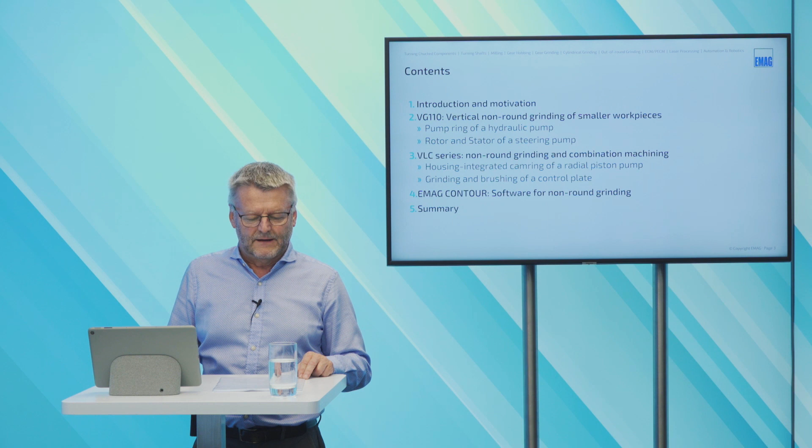Here are the contents of this webinar. First, some information about the motivation of this webinar. The second, bigger part: we will introduce our VG110, a vertical non-round grinding machine for small hydraulic parts. Next, our VLC series, bigger machines, on which we will show two applications for non-round grinding and a combination. Then you will get information about EMAG contour, a software for non-round grinding. At the end, we make a summary.

So let's start. What's the motivation of this webinar? According to a study by Growth Market Reports, the global pump market is a growth market with an annual growth potential of around 4% until 2031. Pump systems are not visible at first glance, but are very important in a variety of applications in our daily life. You find pump systems in cars, commercial vehicles, vehicles for agriculture and construction.

You can also find pumps in household applications or heating applications. The increasing demand for energy efficient pumps is likely to boost demand for pumps on the market. Therefore, the pump market is an interesting market area that differs from other market areas which currently have stagnation or decline in terms of growth. That's the reason why we focus on the pump market.

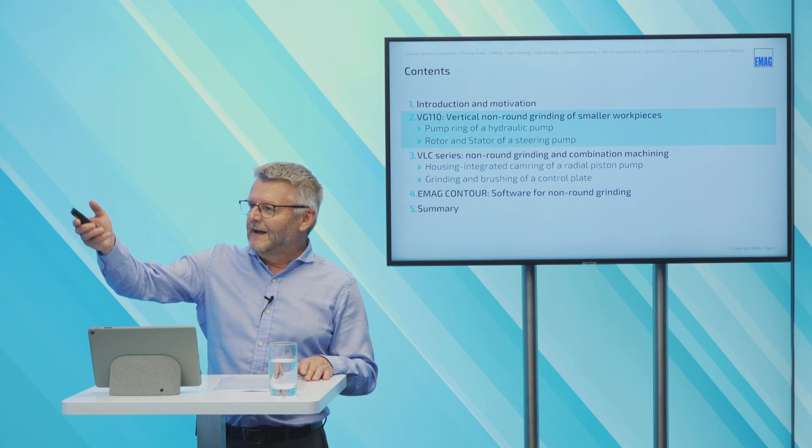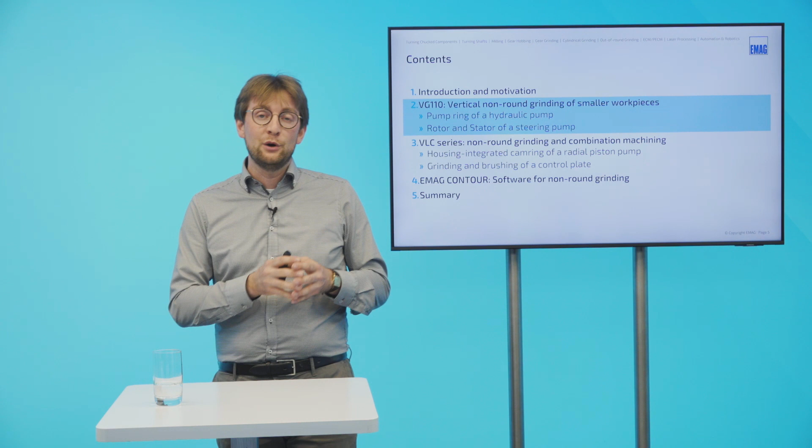Welcome, ladies and gentlemen. My name is Yannick. I'm responsible for the Department of Technology at the business unit grinding in Salach. I will now introduce our machine concept VG110, optimized for the production of small non-round geometry parts up to a workpiece diameter of 110 millimeters. I will show two use cases, two application examples we realized with our customers: a pump ring for hydraulic application, and rotor and stator of a steering pump for an agriculture vehicle.

The VG110 is a really compact solution for the grinding process, as you can see in relation to the size of the operator's panel. We have a very small footprint, just a machine width of 1.4 meters, so it requires very little space on the production shop floor. The workpiece portfolio that can be machined includes rotors and stators for internal gear pumps, and pump rings for vane pumps. We will focus on this in this chapter, but non-round parts for camshafts, for example, can also be ground on this machine.

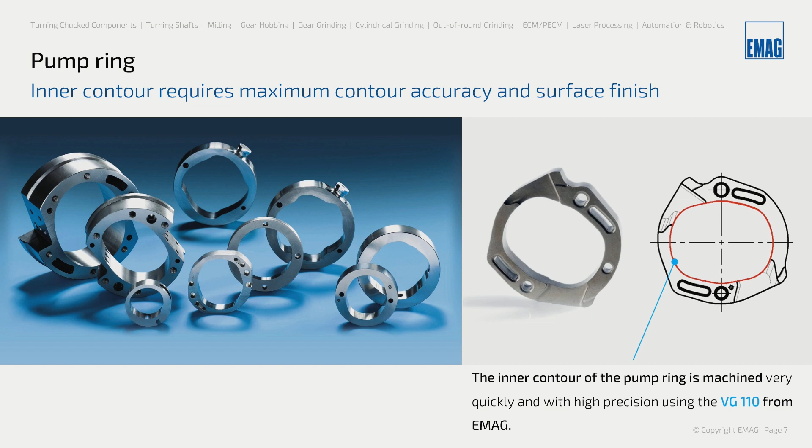We start with the core component of a vane pump, the pump ring. Its contour accuracy and surface quality significantly influence the noise emission in the application, and also the energy efficiency. So in this application, a grinding process designed for its optimum does not only save resources in the production of the part, but also in its application, because the energy consumed by pumps with good quality is much lower. So we have a positive influence on the whole life cycle of pump parts.

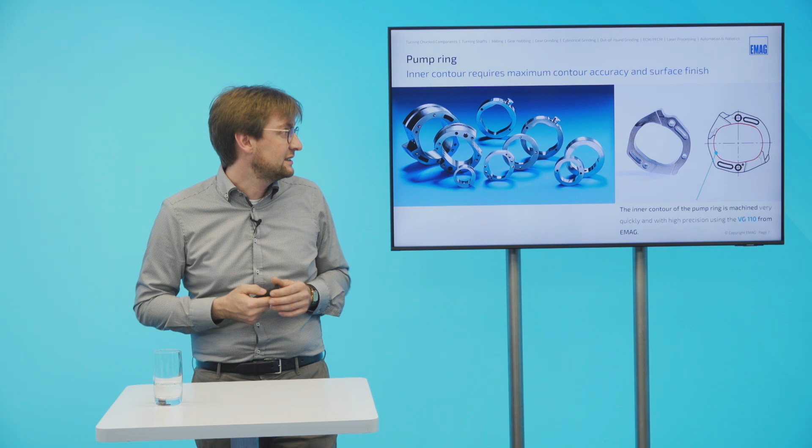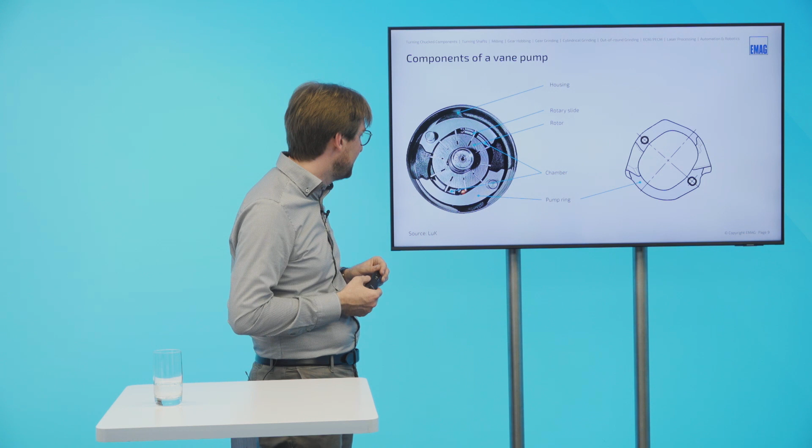This is how the part looks, made of steel. The pump ring is fixed in a housing. You see here the flat ground surfaces, and in these two areas are the inlet areas where the fluid comes in, and in the fluid chambers separated by the vanes, we have a pressure buildup.

What is the machining task for this part? The workpiece is made of hardened 100 chrome 6 or sinter metal D32. We have to grind the inner contour, and we have to remove a grinding allowance of 0.8 millimeters in diameter. The biggest challenge in this context was to achieve an average surface roughness of 0.2 microns, while machining a very high grinding allowance, nearly 1 millimeter.

Of course, there are some requirements with regard to position and profile. Position deviation must be lower than 50 microns, the profile deviation lower than 20 microns, a straightness deviation maximum 2 microns, and a perpendicularity of maximum 7 microns is required.

The basic machine concept of the VG110 is based on decades of experience at EMAG with vertical grinding machines, also with other combination technologies for fine machining.

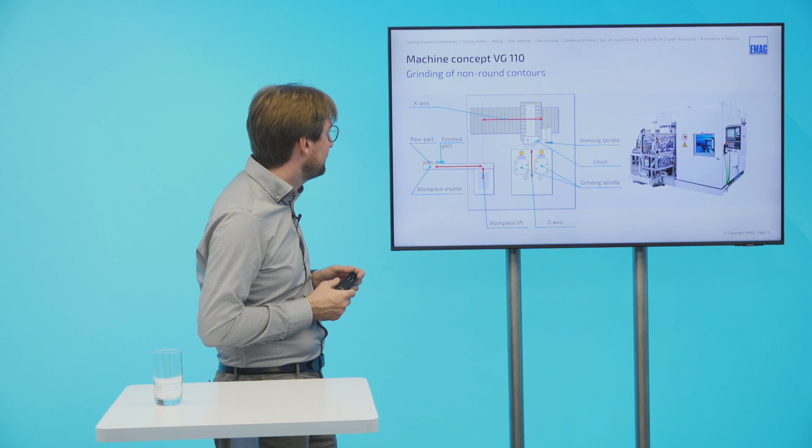The customer or his workpiece handling system positions the raw part at the workpiece shuttle in horizontal orientation, and next to this position he gets the finished part after grinding. The workpiece shuttle brings the part into the machine, so it is the interface to the surroundings.

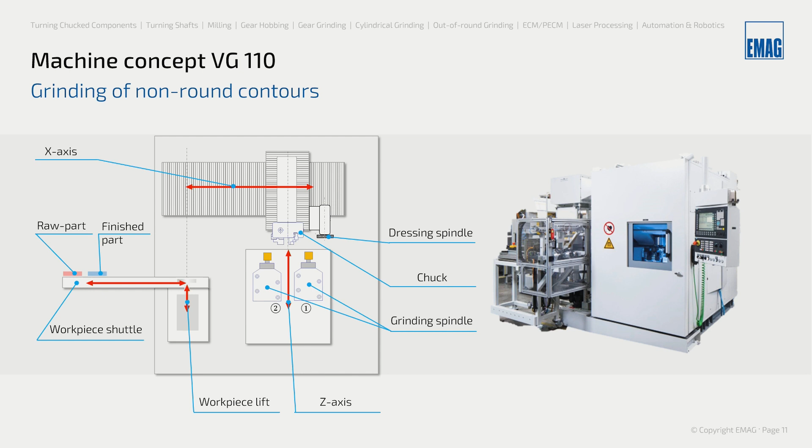The workpiece lift is responsible for the angular orientation of the part and lifts it up to the clamping device, which is fixed on the workpiece spindle. The workpiece spindle is moved in X direction and brings the part into the machining area, where we find two internal grinding spindles which are moved in Z direction towards the part.

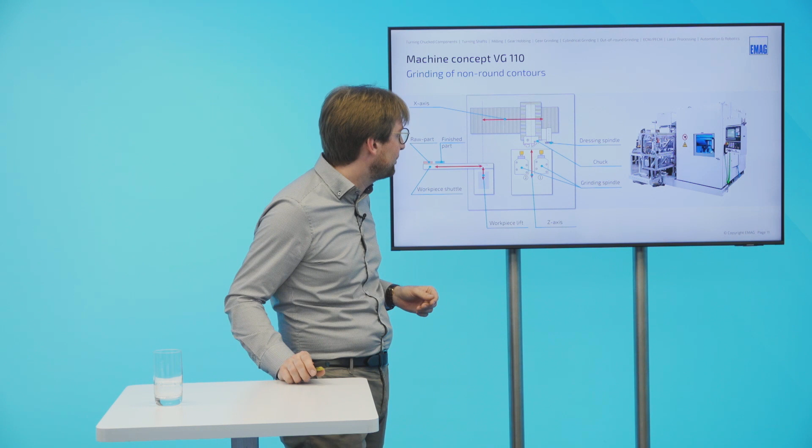In case that we use vitrified grinding wheels, they are dressed in the machine, and the dressing spindle for this purpose is mounted on the workpiece spindle.

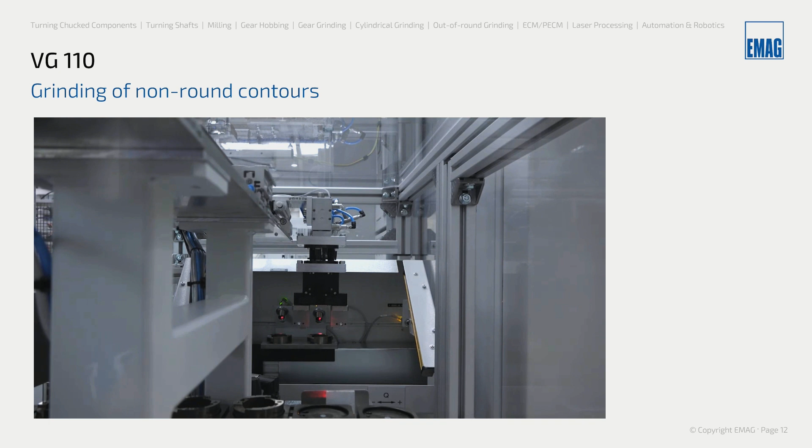Now we have a look at an automated solution for this machine concept. You see the workpiece handling brings the raw part to the shuttle and gets the finished part after grinding. Once again, the raw part is positioned on the shuttle, and the finished part is removed from its position. The workpiece lift brings it to the chuck, and now the grinding process takes place.

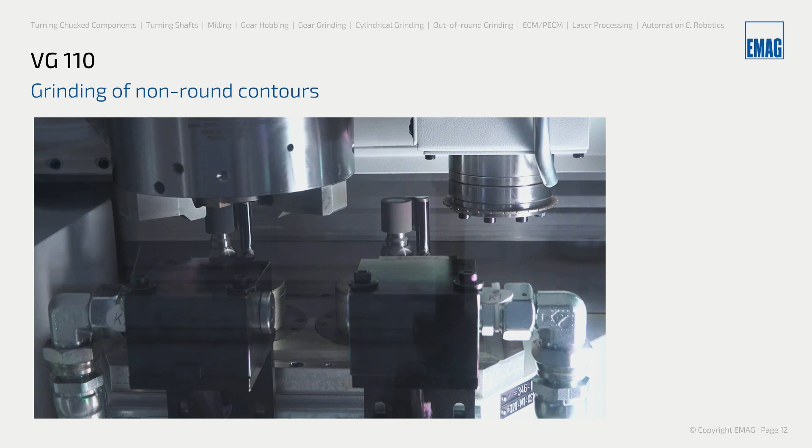As you can see, we're using 3D printed cooling nozzles to make sure that the coolant is in the correct position, especially for internal grinding applications. This is very crucial to make sure there is no grinding burn for high material removal rates.

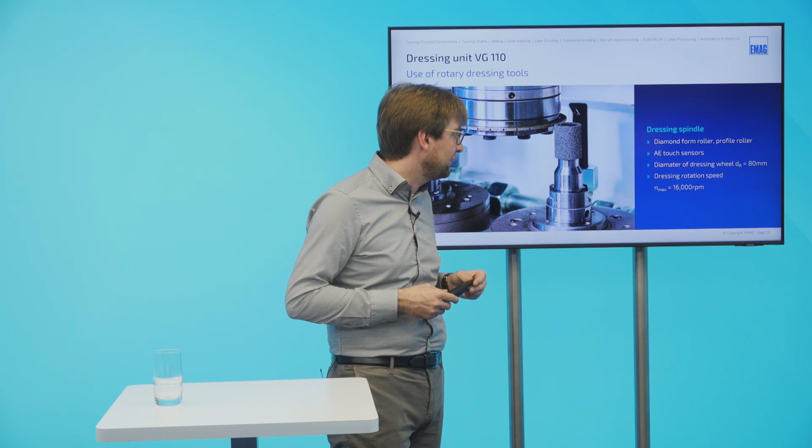The grinding wheels can be dressed in the machine. We use a rotary dressing spindle with a maximum rotational speed of 16,000 revolutions per minute. We have a touch sensor system based on acoustic emission to find the first contact between dressing wheel and grinding wheel, and to make sure to dress the grinding wheel as little as possible, but also to make sure we get the required sharpness of the wheel. We are able to achieve with this rotational speed the common ratios of dressing speed, which makes the process very robust. The diameter of the dressing wheel in this application was 80 millimeters.

Our grinding strategy is based on a two-step grinding process. First, we did a pre-grinding process to remove as much material as possible with a very high feed rate. For this purpose, we used an electroplated CBN grinding wheel. The non-round geometry was realized by an interpolation of the X-axis and the rotating C-axis.

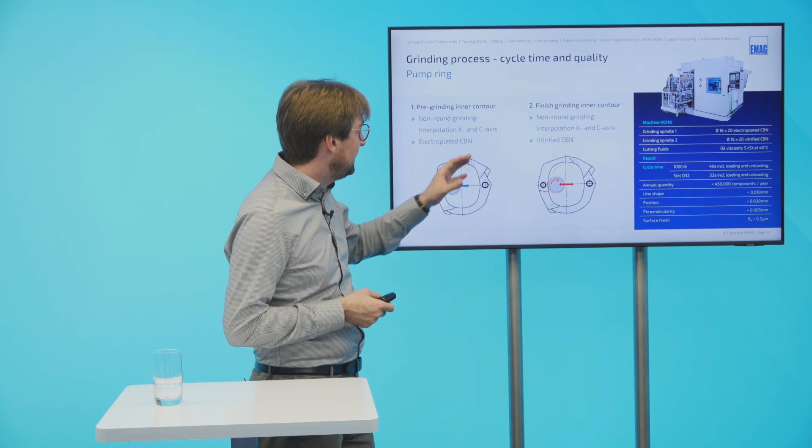After getting very close to the final geometry, we used a finish grinding process for the inner contour to make sure that the shape deviation is as small as required, and also to make sure that the surface roughness of 0.2 microns was achieved. Here we use the vitrified CBN grinding wheel, which has been dressed in the machine. The grinding wheel diameter was 16 millimeters in this application, and the width of the grinding tool 20 millimeters.

We used oil as coolant. It is very important to mention that the viscosity should not be higher than 5 centistokes, because it's very dangerous to get an aquaplaning effect. We have a very large contact area between the small grinding tool and the workpiece, and an oil with higher viscosity can lead to high normal forces, which causes shape deviations of our part.

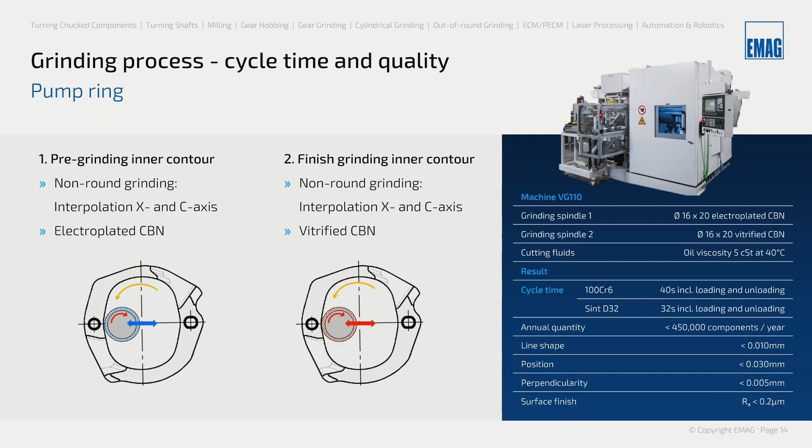We achieved the following cycle times for 100 chrome 6: 40 seconds, which includes loading and unloading of the part, and of course the two grinding steps. Because of the better machining behavior for the sinter metal part, we achieved a cycle time of 32 seconds. All in all, an annual quantity of 450,000 parts could be machined with this concept.

The achieved quality is also shown here. Straightness deviation was lower than 10 microns, position deviation lower than 30 microns, perpendicularity smaller than 5 microns, and the biggest challenge in this context, average surface roughness, was achieved with lower than 0.2 microns.

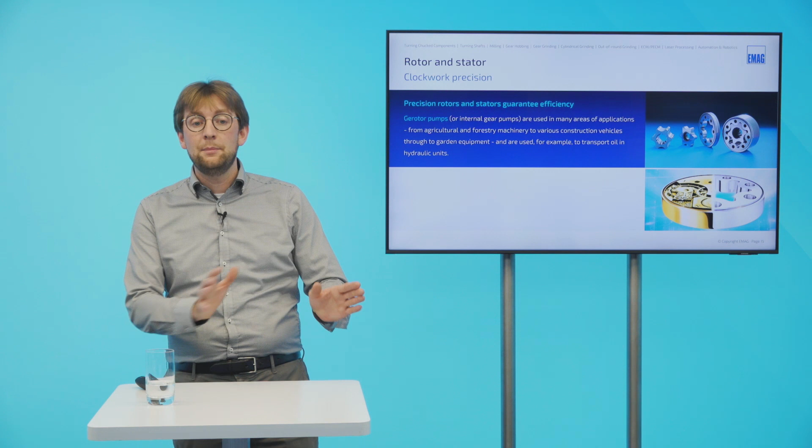Another application example where surface and geometry quality is very important are Gerotor pumps, also known as internal gear pumps. You find them in many hydraulic applications: agriculture, forestry machines, construction machines, equipment for garden, or even in consumer goods.

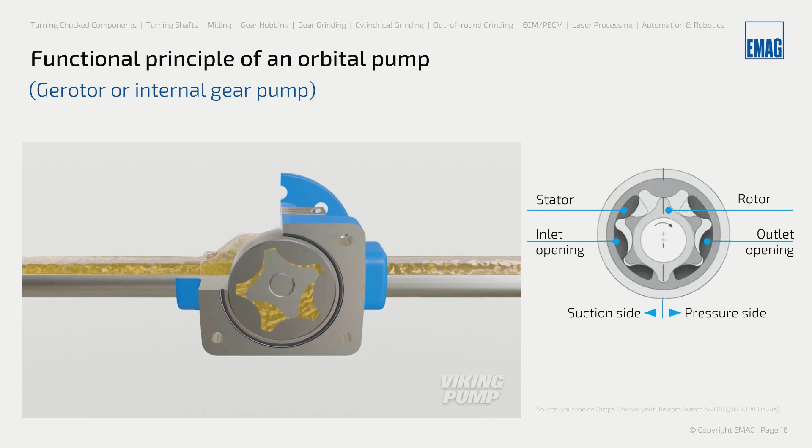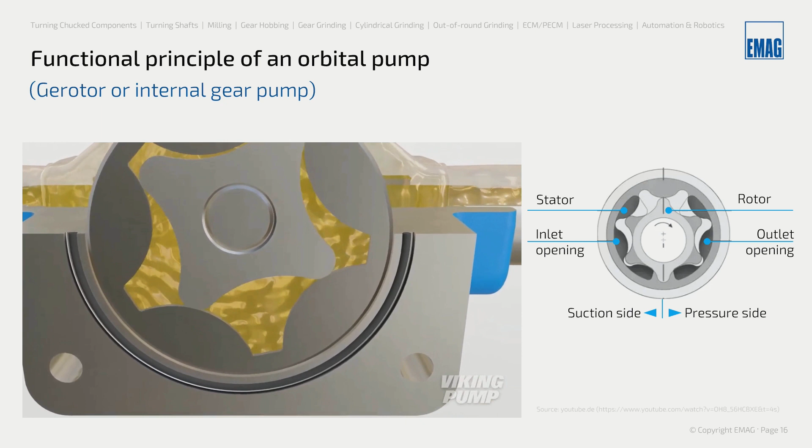The functional principle of this part is a bit different. We achieve an increase of the fluid volume at the inlet side by the geometry of rotor and stator and the required relative speeds. We have an increase of volume on the inlet side, and then the chamber volume gets smaller, so we have a pressure build-up. This is why, especially in this case, the geometry of the part and its shape deviations are very important for the application behavior.

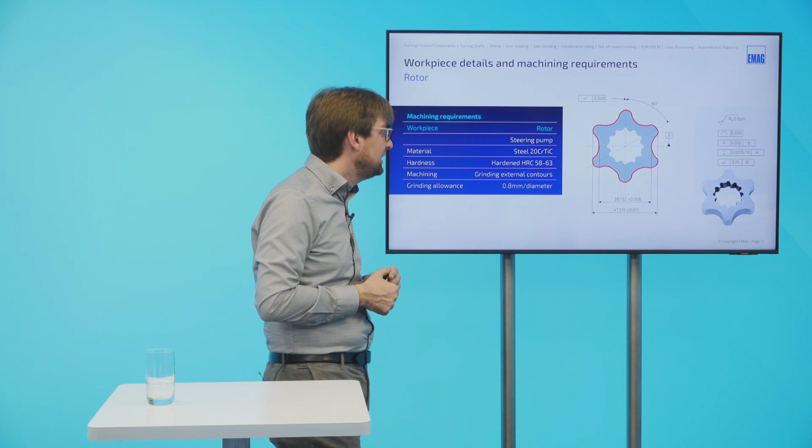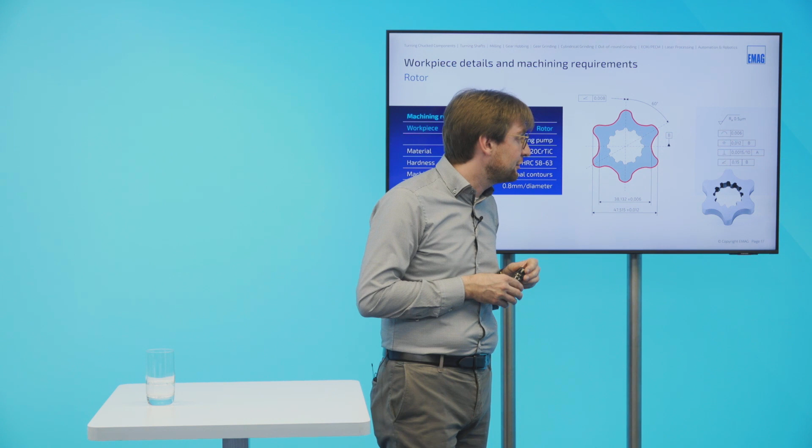For the rotor, we had to grind the external contours. Material was steel 20CrTiC, hardened up to a Rockwell hardness of 63. The stock allowance for this application was 0.8 millimeters. The accuracy of the finish diameter was plus minus 6 microns, and we had to achieve an average surface roughness of 0.5 microns, profile deviation lower than 6 microns, parallelity of the part referring to the B-axis lower than 12 microns, perpendicularity maximum 15 microns, and also the angular deviation, quite challenging, for the angle between the peaks of the polygon.

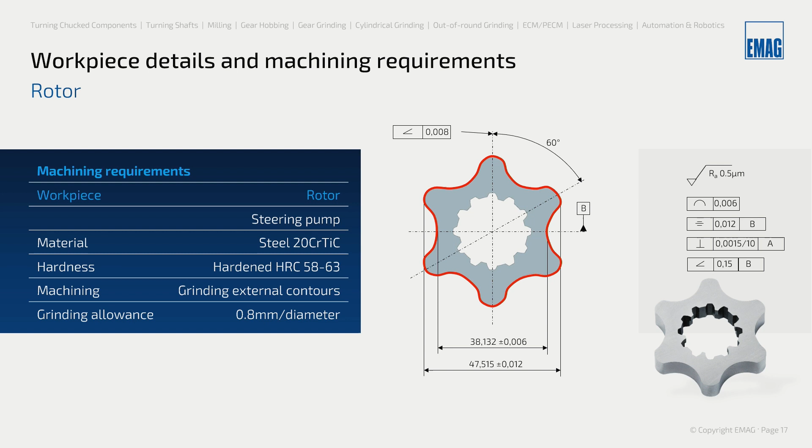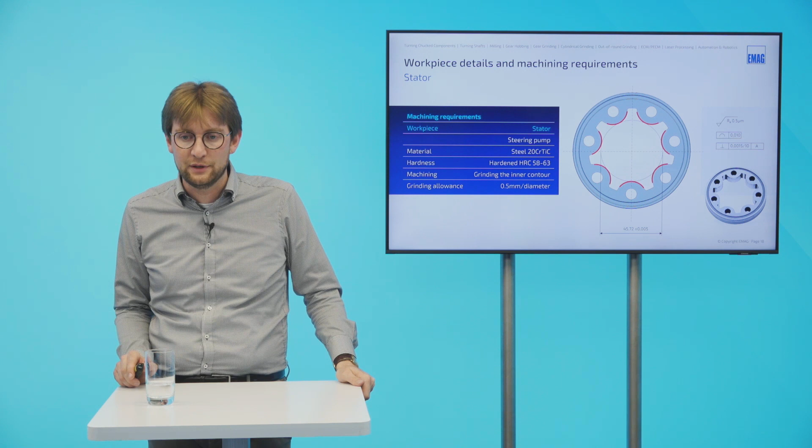What was the strategy for this grinding application? We first did a pre-grinding process. The aim was to achieve a very high material removal rate, then do an intermediate measurement procedure with an integrated probe in the machine, do the correction of the diameter, and then carry out a finish grinding process to make sure that the surface and geometry quality is according to the requirements.

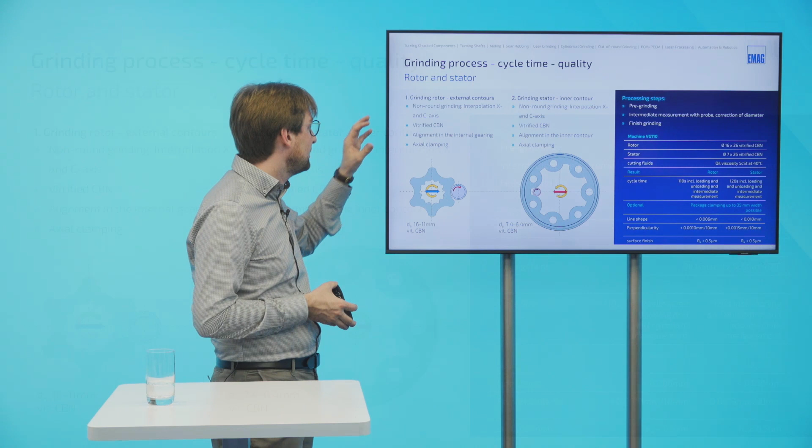For the external grinding process of the rotor, interpolation of X and C axis also took place. We used a vitrified CBN grinding wheel. We did the orientation and angular deviation according to the gearing inside, and then did axial clamping on the workpiece spindle. The geometry allowed us to use a grinding wheel diameter of maximum 16 millimeters.

For the inner contour grinding process, the geometry only allows a vitrified CBN grinding wheel with a maximum diameter of 7.4 millimeters. The grinding wheel width in both cases was 26 millimeters, chosen according to the width of the workpiece.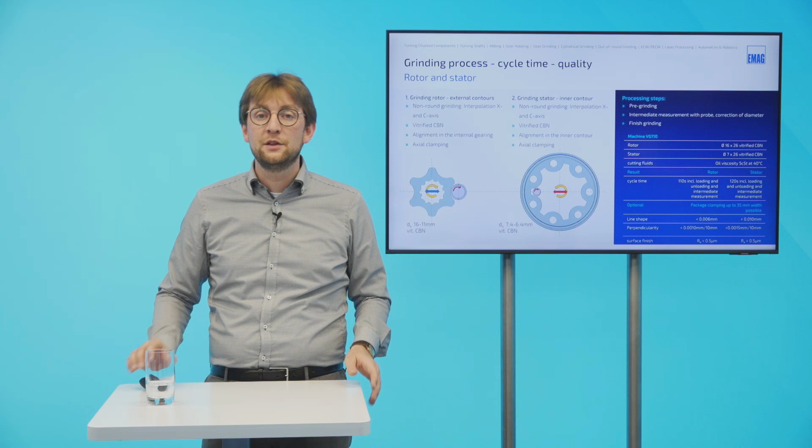The same coolant was used, oil with a maximum of 5 centistokes, and this resulted in a cycle time of 110 seconds for the rotor, which includes loading, unloading, the measurement, and the two grinding process steps. For the stator, it was 120 seconds.

Depending on the workpiece geometry, especially the width of the workpiece, it would even be possible to grind more than one part in one operation. We would use a package and clamp this in the chuck, possible up to a width of 35 millimeters for this geometry. In case we are able to use bigger grinding wheel diameters, then even thicker packages would be possible to machine.

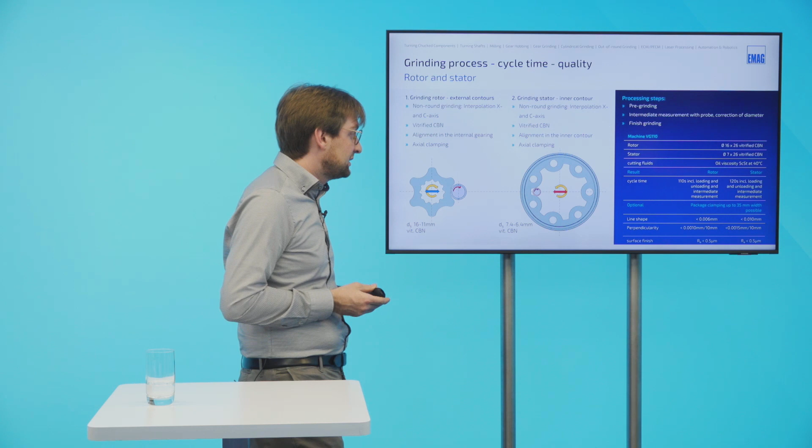The straight deviation that we achieved was 6 to 10 microns, perpendicularity also according to the requirements, and the surface roughness lower than 0.5 microns.

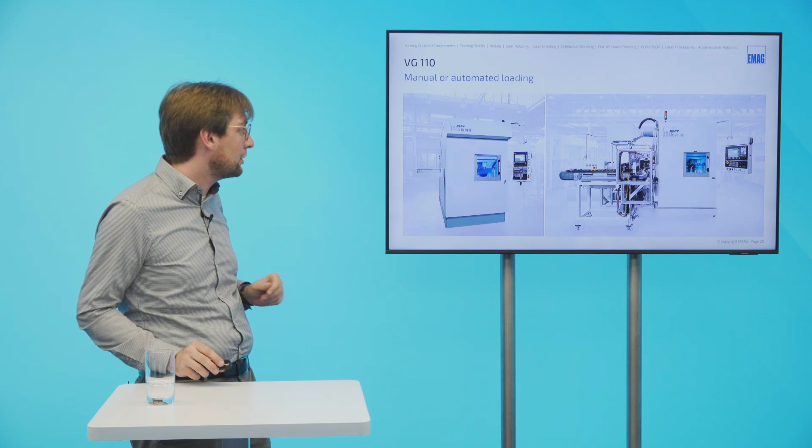As already mentioned, the workpiece shuttle is the interface between machine and surroundings, and can be operated by manual loading, or you can also discuss with EMAG our in-house workpiece handling system to do an automated loading of the machine.

Before I finish this chapter about VG110, I'd like to summarize the main features of this machine. We have very high vibration damping because we use our mineralite machine base. This enables us to achieve a long tool life and high surface qualities. Because of our vertical spindle orientation, the chips can fall down into the dust collector, reducing the interface between abrasive particles and the machine axis to a minimum.

We have short chip-to-chip times because of our integrated automation by means of the workpiece shuttle and the pickup spindle. We have a very small footprint, so you need very low space in your production, and the accessibility of the grinding spindles and also the clamping device is very good.

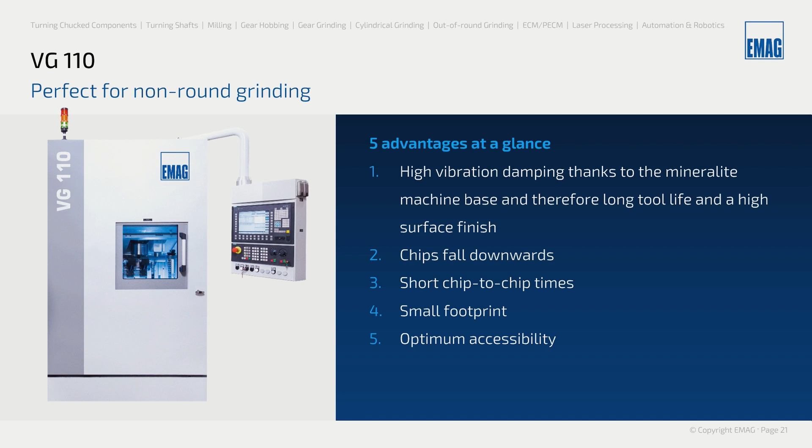You can open the front door and have a perfect overview of all the important parts and components of the machine. This makes it easy to do the setup for different geometries, for different applications, and the two grinding spindles give us high flexibility with regard to the workpiece geometry.

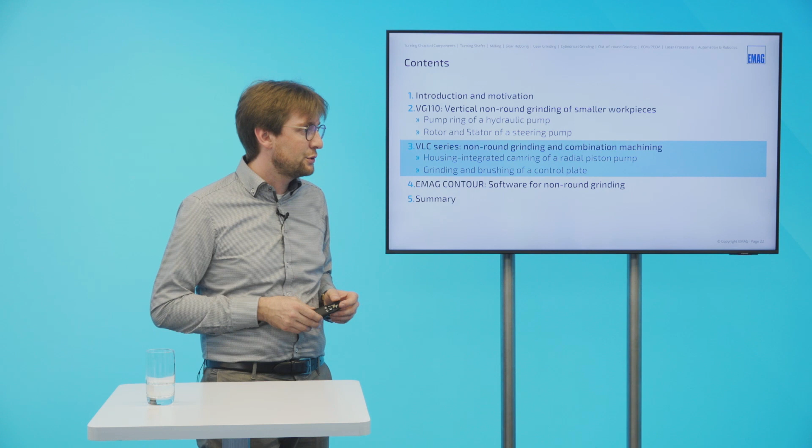So at this point, I think it makes sense to have a look in the question chat. There are already some questions open. Yannick, the first question is: which raw part quality is required for machining pump rings?

As usual for a grinding process, we wish to have a raw part geometry which is very close to the finish part geometry. This gives us the opportunity to reduce cycle times when we grind a very small grinding allowance. But with regard to the geometry requirements, especially perpendicularity, we have to pay a lot of attention to the flatness of the contact area, which is the reference in our clamping device. So usually the parts should be double side ground before our internal and external grinding processes.

There is a next question. What is the minimum quantity for an automated machine?

This is a question which is difficult to answer in general, because it depends on the cycle time for your individual part, the labor costs at your location, and so on. So this is a question that should be discussed in much more detail with our experts at EMAG LLC, or especially our colleagues from technical sales here in Salach. They will find the correct answer for your individual machining task.

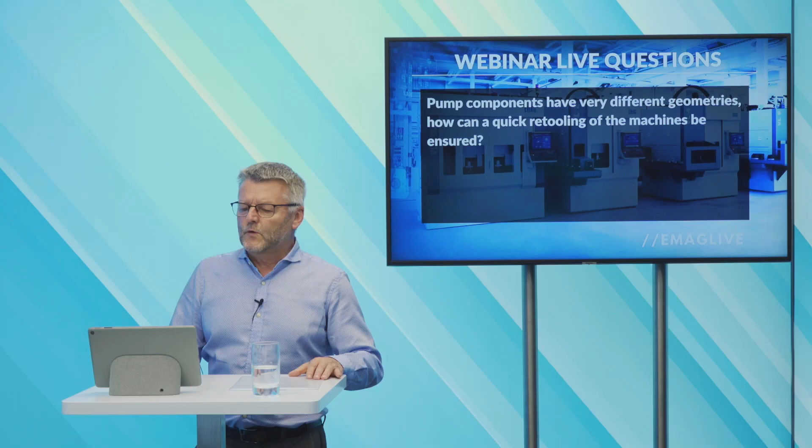The next question: pump components have very different geometries. How can quick retooling of the machine be ensured? We absolutely agree, there is a big variation of geometries and a big variation of quality requirements.

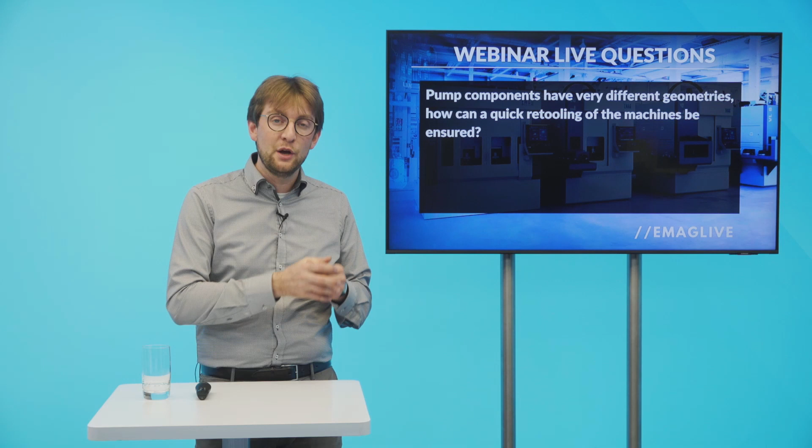The first advantage is that our machine is equipped with two spindles. As shown in the last example, we can set one spindle for external grinding, and the other spindle can be set for internal grinding. We have huge flexibility in this context, and the vertical principle gives us the opportunity to reach all the relevant parts and components, to change the clamping device, the chuck, and also the grinding tools. We have a good overview, make sure everything is correct, that we can start the process after setup, and we are sure that we do not cause any crash or other problems.

So there is another question: are only CBN grinding wheels used in the machine, or is it possible to use corundum grinding wheels as well?

In general, it would also be possible to use a corundum grinding wheel, but as we have very small grinding wheel diameters, we have just a small number of grinding grains which have to perform the machining work. So there are high loads on these few grains, which causes a lot of grinding wheel wear.

So it absolutely makes sense for these applications, especially for high batch sizes, to use ceramic grinding wheels, super abrasives for steel. But the other aspect is that we have very high temperatures for internal grinding, because we have a long contact arc between grinding wheel and workpiece.

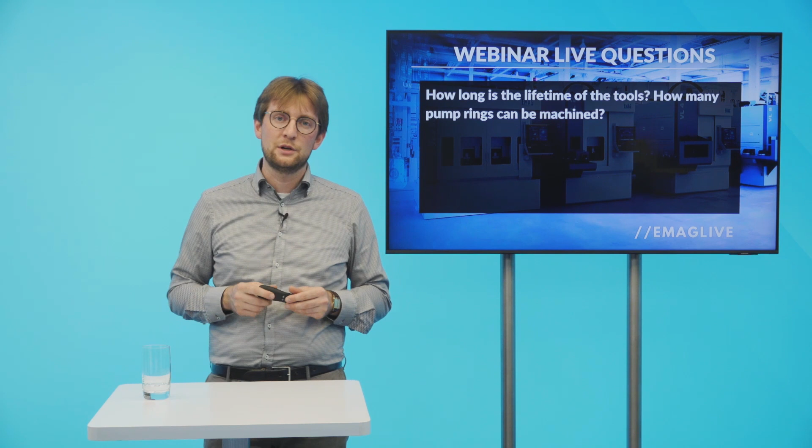Now we are talking about the VLC series, non-round grinding and combination machining. This is another machine concept, and I will show you two applications. One is a non-round grinding of a housing integrated cam ring, which you can find in a radial piston pump. The second is a combination grinding and brushing process of a control plate, which you can find in the axial piston pump.

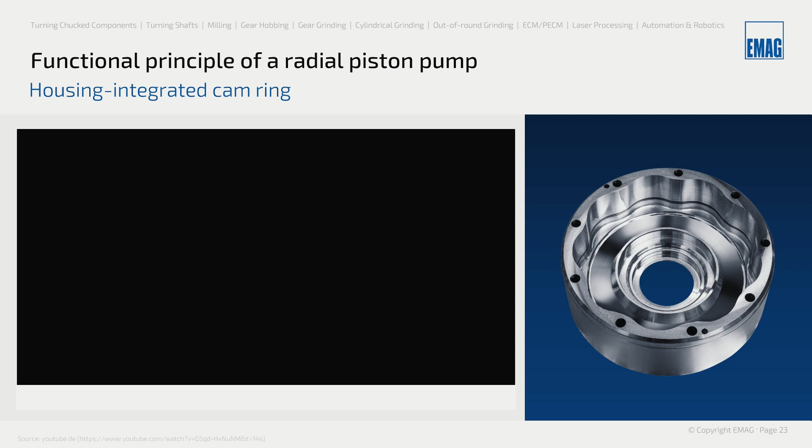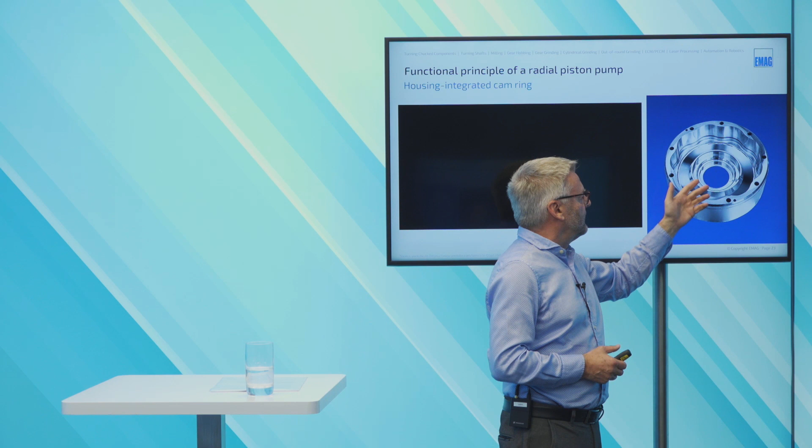So here on the right side, you see a housing integrated cam ring. These are workpieces with dimensions much bigger than before. Inside this housing, this cam ring, many radial pistons are moving up and down to realize the suction and pressure function of a pump. The contour of the cam ring determines the radial stroke movement on the pistons, which results in a constant volume flow on the pressure side without any pulsation effect.

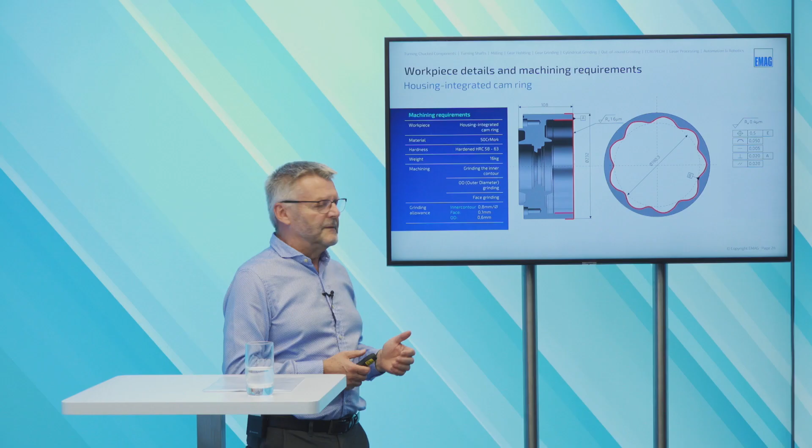Let's have a look about the workpiece details and the machining requirements. Here you see the OD is 232 millimeter, and the width of this part is 108 millimeter, and the weight, you can see in the left table, it's 15 kilogram. So this part is already much bigger. The material of this housing is hardened 50CrMo4 with a hardness of 58 to 63 Rockwell.

Here the machining we have to do is colored in red. There is one side, this is the inner contour. Here inside, what we have to grind: we grind the face and we grind also the OD. Interesting is the big grinding allowance we have in the inner contour. It's 0.8 millimeter in diameter, and if you have such a big ID diameter inside with 190 millimeter, you can imagine it's a big volume which we have to grind.

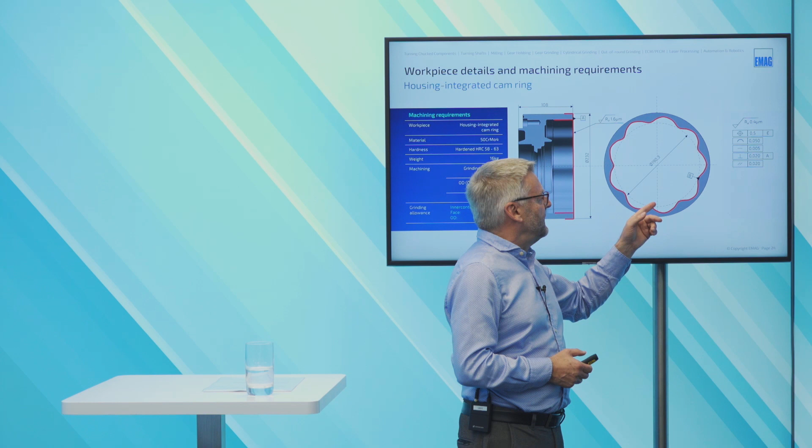The request on the drawing was RA 0.4, especially the contour quality over 360 degrees with 50 microns, the straightness of the inner contour of 5 microns, and the perpendicularity of 20 microns to basic A, which is the front face which we grind. These are special qualities.

So what's the machine concept? Here we use our VLC 350 GT machine. This machine is a multiple technology machine because you can use inside many different technology units.

On the right side of this picture you see some standard picture. On the right side we have a turret for turning tools. You have an ID spindle and an OD spindle. In this machine concept we have the same machine bed, made from MINERALIT, like what we have already before on the VG110. As I told you already, the big advantage is if you have a workpiece, you can combine the best technologies, different technologies, which you can use in one clamping to get the best workpiece quality.

Here, some words for the design. We have an x-axis, and we have here the workhead, and the x-axis moves the workhead and the chuck from the loading area inside the machine, and after machining back for unloading. We have a z-axis. This is a concept of the pickup concept of EMAG, and especially here we have a conveyor system where you have approximately 20 pallets where the operator can place the raw and finished parts.

And inside the machine here, specially we have 3 grinding spindles, and with this concept it's possible to make a non-round grinding, a round and a face grinding process in the machine inside.

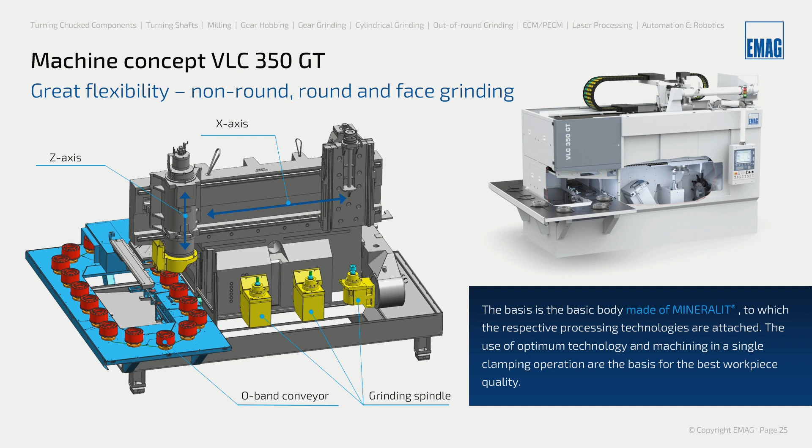Here we see the grinding process chain. We start with the inner contour grinding. This is a non-round grinding process. We have interpolation between the linear x-axis and the rotation C-axis, and we use the vitrified CBN grinding wheel.

The second is the face grinding. On the face grinding we also use a vitrified CBN grinding wheel, but this was a special specification. It was a self-sharpening specification. The meaning is it's not necessary to dress this grinding wheel because it's self-sharpening.

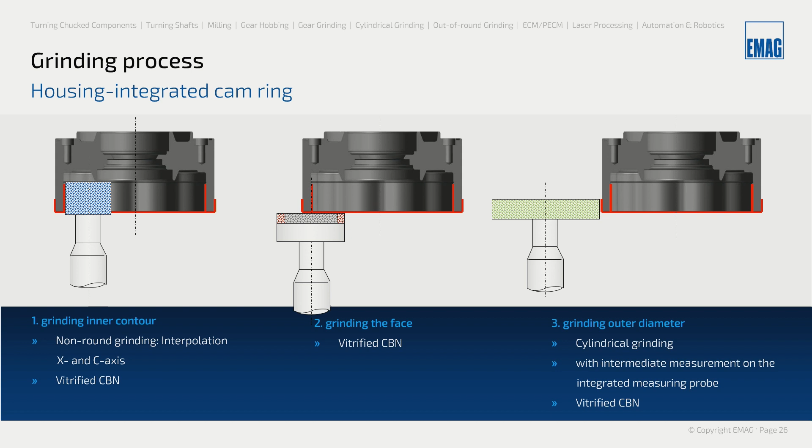And the third grinding process we have is OD grinding. It's a cylindrical grinding, and based on the request that we have to reach OD quality of less than 10 microns, we make a pre-grinding, we make a measuring, and then the finish grinding. For this third process, we are also using vitrified bonded CBN.

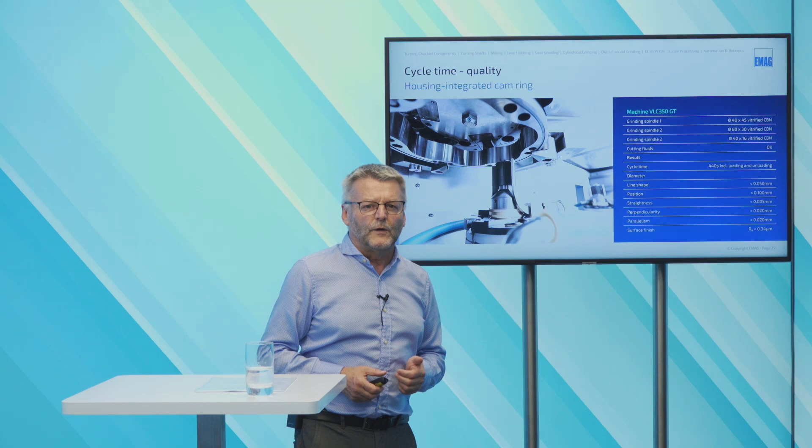Let's have a look about the results, about cycle time and quality. For this whole grinding process, basically we have a cycle time of 440 seconds, including loading and unloading. For the process, we are using oil as cutting fluid. And if you see the inner contour, the line shape, we reached the requested qualities. We are less than 50 microns. The straightness is less than 5 microns, and the surface quality is less than 0.34.

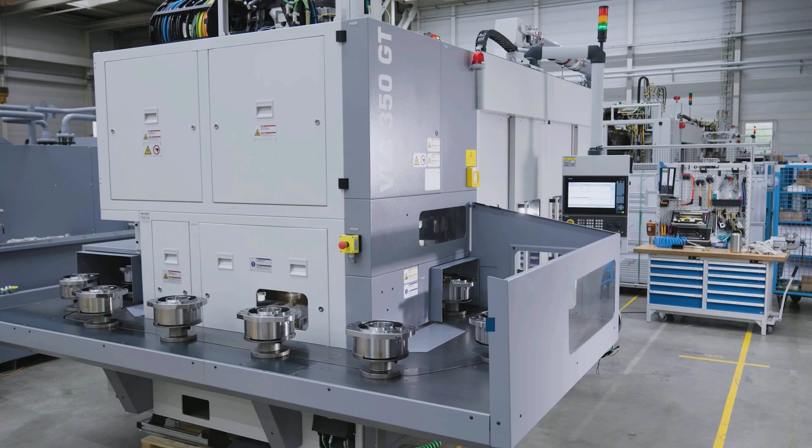So let's have a video of this grinding process. This is a front view of the VLC 350 GT. On the left side we have the conveyor type with the pallets for the raw and finished parts. Here we pick up this housing, this cam ring housing.

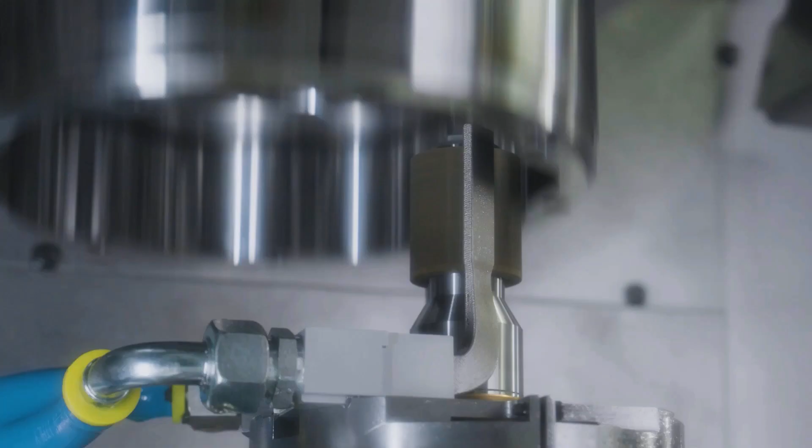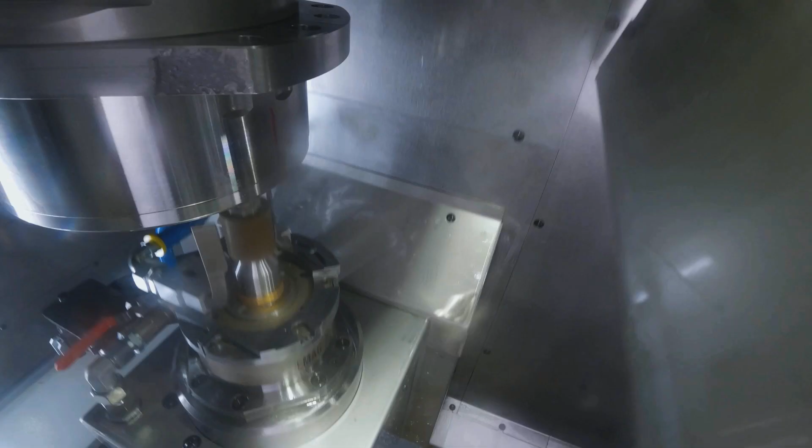Then we have to make a pre-radial measuring. There is a reference hole inside, and later the contour must be to a very small tolerance to this reference hole. Therefore it's necessary to make this radial measuring before. Here you see now the non-round grinding process, interpolation. The second process is now the face grinding.

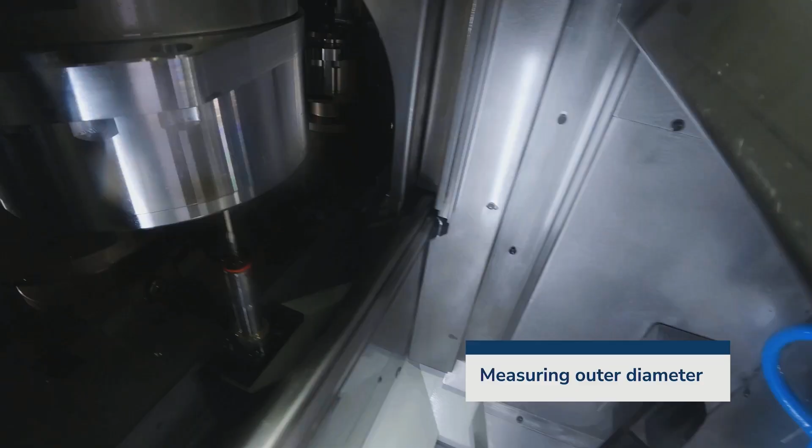This is done with a self-sharpening specification, CBN specification. Now we start with the pre-grinding of the OD. That's the first step. Then we go to the measuring to check the diameter and give the information to the machine what's the stock for the finish grinding.

That at the end we have a constant quality less than 10 microns for the OD. After the finish grinding, the workhead moves the part back to the unloading area and puts the finished part on the pallet.

So the next application is what I want to show you. This is a control plate which you can find in an axial piston pump. Here the dimension, you see this is a smaller part, OD with 71 millimeter. The material of this plate is 8CrMo16 hardened.

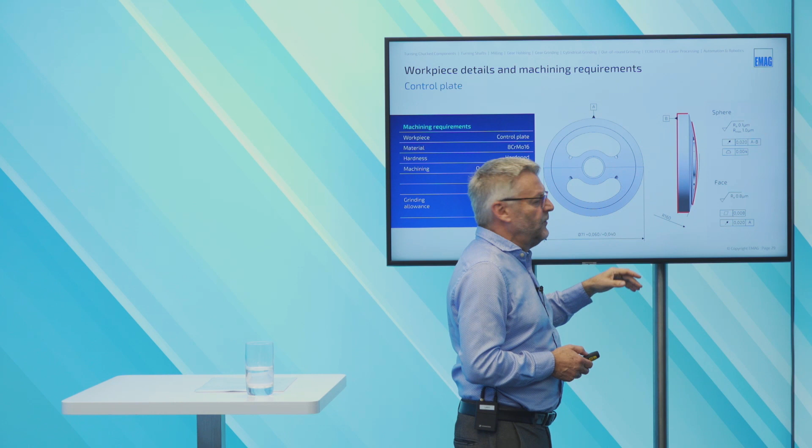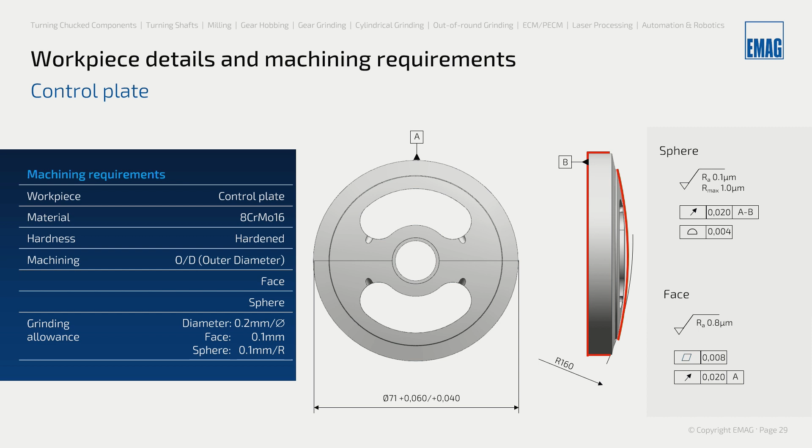Again, what we have to machine is colored in red. This is a face, it's a basis B. We have to do the grinding of the OD, and special here we have to grind the sphere. This is a radius, and the quality requirements are high for this sphere because this is a special function later in the pump. The surface quality Ra 0.1.

Then we have a run out of 20 microns to AB. AB is face and the OD, and the area form contour error is only 4 microns. Here on the left side you see the stock what we have to grind. Diameter is 0.2 millimeter in the diameter, face 0.1 millimeter on the face, also 0.1 in radius.

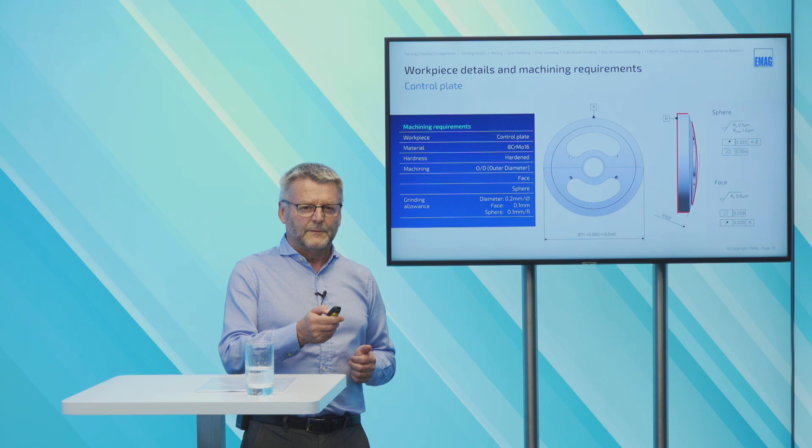Which machine are we using? Now we are using also the VLC concept, but the smaller sister of the VLC 350 GT. This is the VLC 200 GT.

Here, very detailed, you can see the process chain. After clamping the part in the ID via a hydraulic operated clamping arbor here in the bore, we do first the grinding of the face. This is a corundum grinding wheel, no CBN, with diameter 400 millimeter.

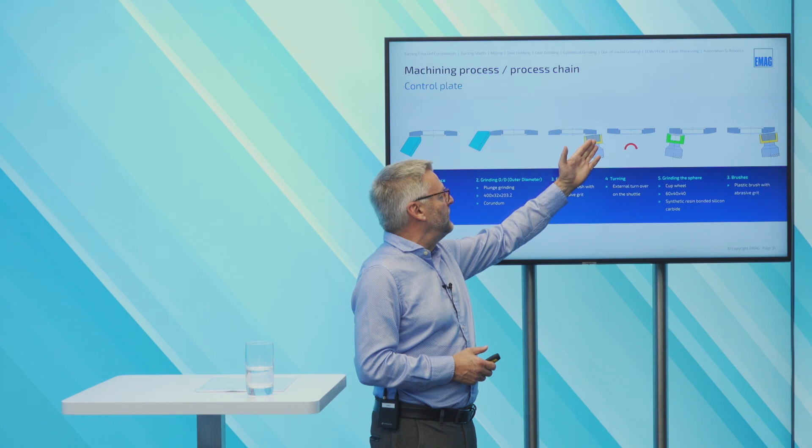We use the same grinding wheel for grinding the OD, and then we start with the first brush process, and you see here this motor spindle takes a plastic brush which has abrasive grit inside. Why do we have to brush this face?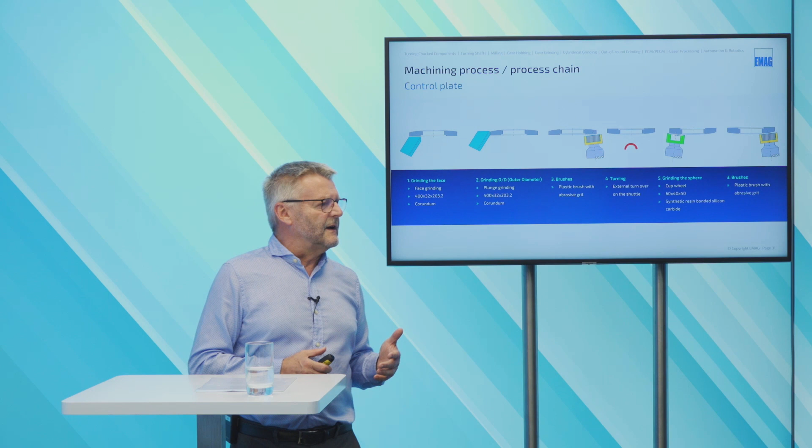The requirement is it's not allowed to have small burrs on the edges on this side. As we have to grind on one side the face and on the other the sphere, we have to put out now the part on the shuttle, an external handover system, turn the part 180 degrees, then we clamp it again in the bore.

And then we come to the second process chain. Basically, here you see number 5, grinding of the sphere. For this we are using a cup wheel with diameter 60, and the specification is a resin bonded silicon carbide, and the last process is again a brushing process with the same plastic brush, to eliminate the burrs on this face.

So here we have a nice view in the machining area. On the left picture you can see on the top the clamping system with the workpiece, and on the bottom side, on the left side, you see the OD grinding wheel, OD grinding spindle in an inclined position.

In the middle you see the inclined spindle with a cup wheel for grinding the sphere, and on the right side you can see the spindle with the brush. Special here, we are using 2 different dressing tools for dressing.

For the corundum wheel, for the OD grinding and for the face grinding, we use a rotation diamond form roll for dressing, and for dressing the cup wheel we have to dress the inner conical side to make the cup shape. We use a fixed single diamond.

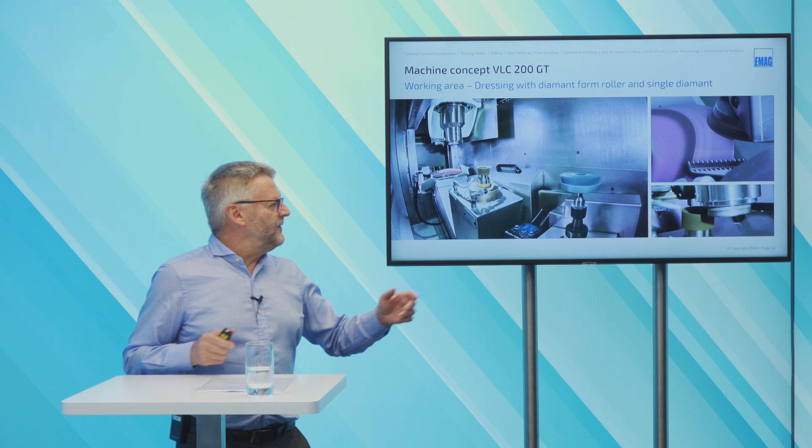Why can't we use the form roller? The reason is, you see, we have a diameter of 60 and we cannot go with this big diameter of the roller from the dressing wheel to go here inside.

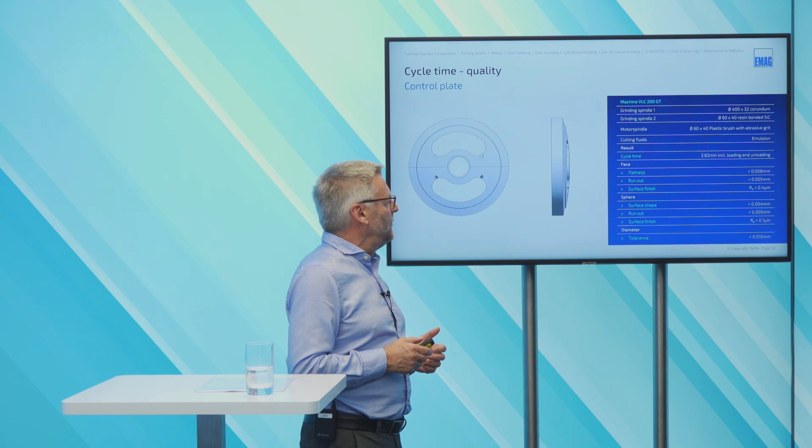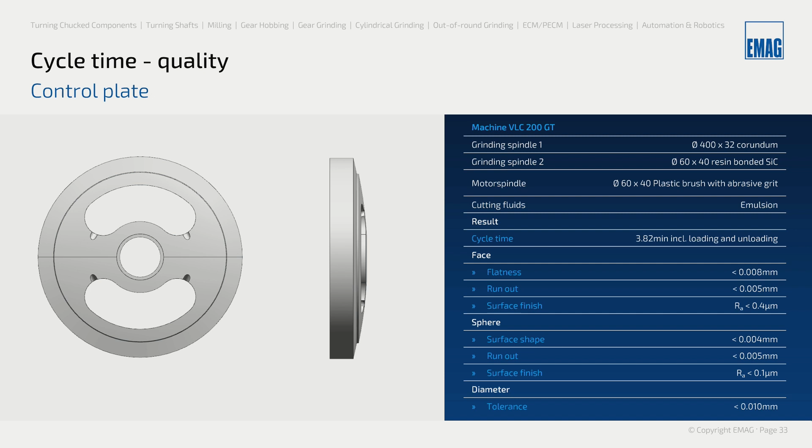Here we get the result, cycle time and quality. The cycle time is 3.8 minutes, including loading and unloading. Let's have a look at the highest quality of the sphere. We reached a roundness form of 4 micron or smaller, the runout was smaller than 5 micron to A and B, and the surface finish quality at the end is also less than 0.1.

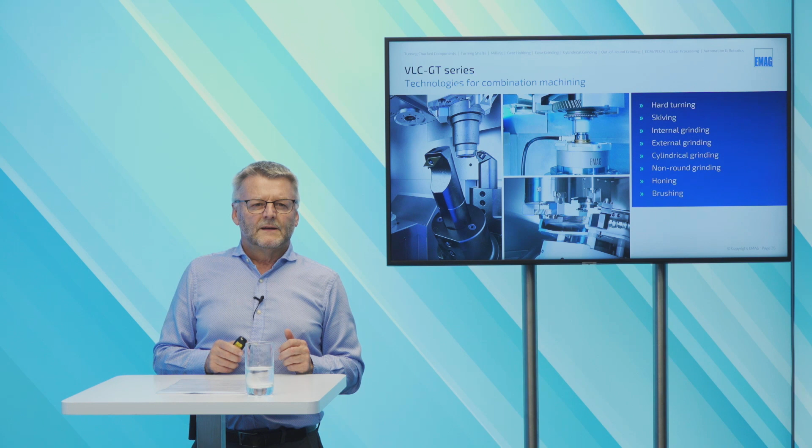Here we have an overview of the technologies which you can combine inside the machine. It's, for example, hard turning, skiving, internal grinding, external grinding, cylindrical grinding, non-round grinding, honing, or brushing process. So it's very, very flexible.

I want to end this chapter with the advantages of this series. Basically what we learned: we can have complete machining of the parts with different technologies in a single setup, so we get maximum accuracy for the workpiece. The big advantage again is to use different technologies like turning, grinding, round or non-round grinding, milling, reaming, or honing in the machine. Then you get the integrated automation. You have short distances, which means short chip-to-chip times.

Also, like most EMAG machines, this is a vertical machine. It's perfect, the chips fall downwards. You have a small footprint here, because if you can do 2 or 3 technologies in one machine, then it's not necessary to buy 2 or 3 single machines. So you have a smaller footprint in your workshop, and the operator has the possibility of multiple machine operation.

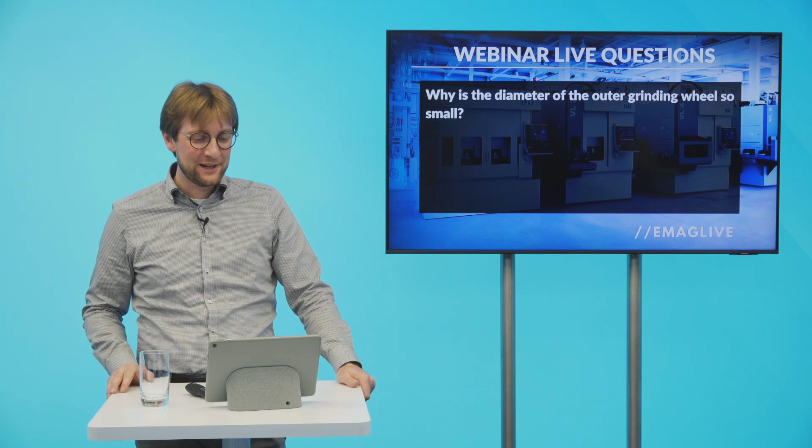We already have some questions from our audience in the chat. The first question, which we already discussed in the German version of the webinar — I think a very good remark — why is the diameter of the outer grinding wheel so small?

The customer basically has two different workpiece types. One type has face quality RA 0.4, which we saw before in the application, and one type has RA 0.2. If you have RA 0.2 and a stock of 0.8 millimeter, the grinding process cannot be done in a single step. You need a rough grinding process and a finished grinding process with different grinding wheels. Therefore, you need already two spindles for rough and finished grinding of the inner contour, and a third spindle for the face grinding. That's the reason why we have basically three small spindles inside, so the customer can also realize RA 0.2 quality. This is an option, or a compromise — if you do the OD grinding, you have to use the small wheel.

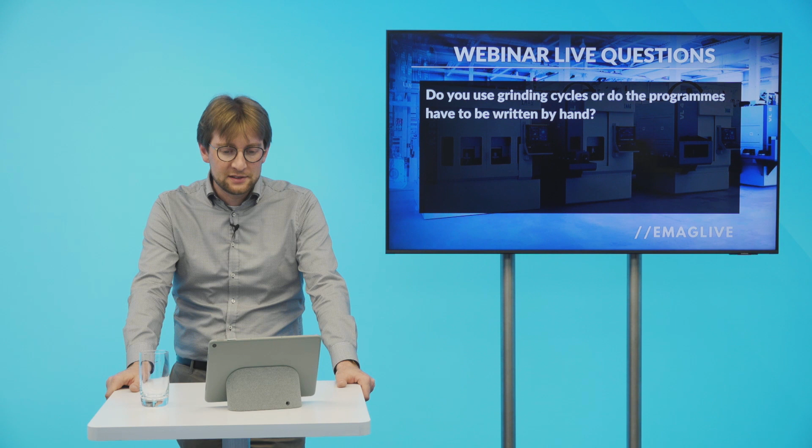Next question refers to the NC programs: do you use grinding cycles, or do the programs have to be written by hand? We have for this machine fixed finished grinding cycles for OD grinding, ID grinding, or inclined grinding, and we also have fixed dressing cycles for face dressing or OD dressing. To finalize a complete NC program, you have to add to these grinding and dressing cycles the dimensions of the workpiece and also the technical grinding or turning data, like cutting speed or feed, and so on.

Is an intermediate measurement of the diameter always necessary? Is it not possible to simply measure in cycles? For this special application, the tolerance should be less than 10 microns, so we basically need intermediate measuring for each part, but this isn't necessary for many other parts. It can also be done in cycles, measuring every 10th or 50th part, for example.

One more question about measuring. What measuring tasks can the integrated sensor perform? Is it possible to integrate an external measuring system to make process corrections if necessary?

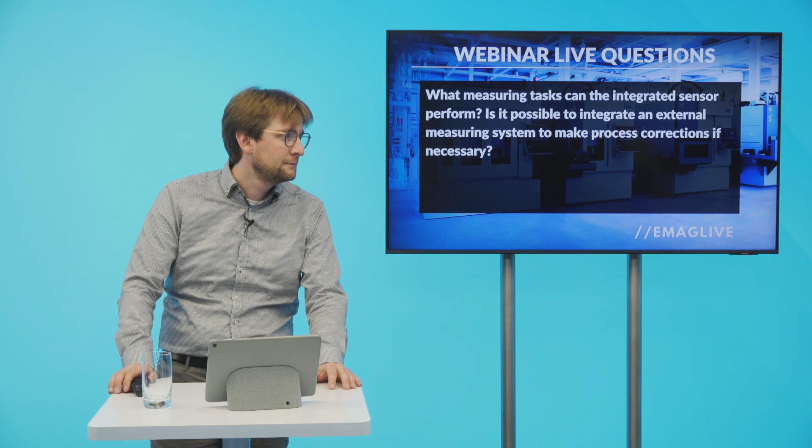Yes. First, the answer to the first question: this measuring probe inside, we can use for radial orientation in the reference hole for the camshaft, and it's also used to set up a new process. We want the first part already in quality, so we machine a first step with stock, then measure, and the second step finalizes the workpiece. This gives us a process where the first part is already a good part.

For the second question, sure - after the machine you can place a post-process measuring unit or post-processing machine. You have an interface to this machine, we get the measuring results from it, and apply a correction at the end on the machine. That's some standard. I think this was the last question about this chapter.

We will do a final round of questions at the end of the webinar after the summarization.

I'd like to give you a short overview of our software tool EMAG Contour, because we work with non-round geometries, very complex parts, where we have to deal with interpolation of the rotating axis of the workpiece spindle and the infeed of our X feed axis, to ensure a very small deviation between the required contour of the workpiece and the ground part.

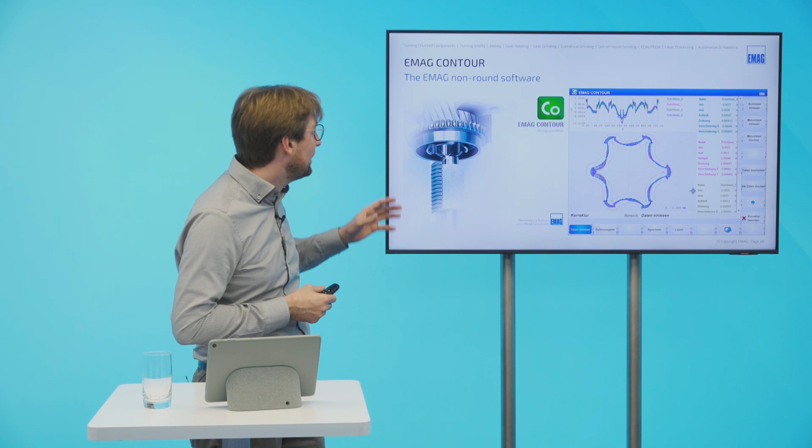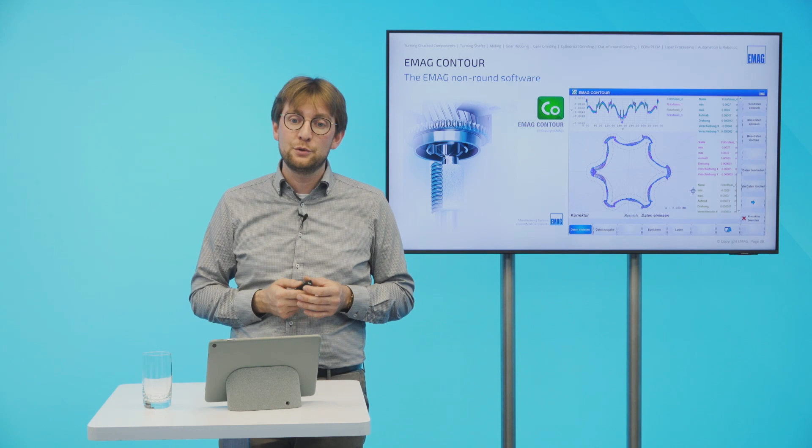Our software EMAG Contour helps because for the interpolation it's very important to take into account the dynamic machining behavior, since we have limited accelerations in the feeds. We have to avoid a swing-up effect, so we must choose not only the correct position of our machine axis in the NC code, but also the correct speed and acceleration to ensure a smooth path of the grinding tool. EMAG Contour is the answer to this challenge.

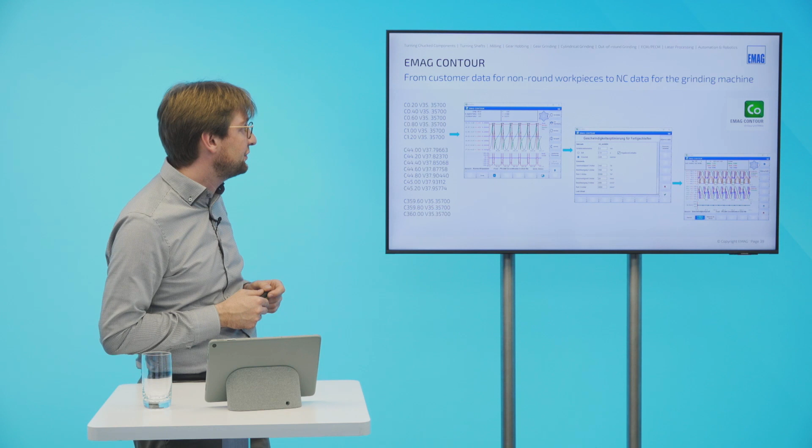EMAG Contour uses the workpiece data from the customer as input and calculates the correct NC data for our different machining concepts as output. So EMAG Contour is the link between the customer's drawing and the commands for the machine, ensuring all the mechanical equipment and grinding tools do the best job to achieve a non-round geometry according to requirements with a very short cycle time. This tool can also be used for our horizontal non-round grinding machines, for example for the production of camshafts.

So finally, I'd like to sum up the content of the webinar, what you heard in the last 45 minutes. We've learned that the market of high precision pump parts is expected to grow in the next years. One reason is the wide range of applications - not only automotive industry, but also commercial vehicles, agriculture and construction vehicles are an important market for high precision pump parts.

EMAG offers specialized machining solutions for different ranges of geometries. The VG110 is the solution for producing parts up to a workpiece diameter of 110 millimeters. It offers a very small footprint and high accuracy for large batch sizes.

The VLC series is the answer for bigger workpiece geometries, also with higher workpiece weight. It's a very flexible machine concept where it's also possible to integrate other fine machining technologies such as hard turning, brushing or honing.

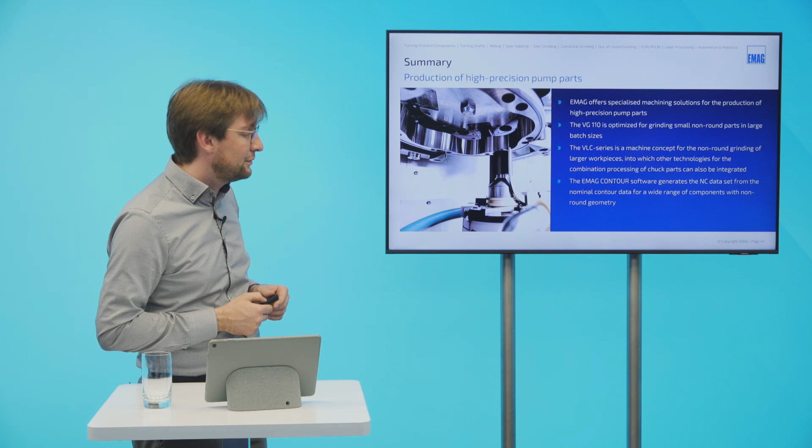EMAG Contour is the software tool that helps us find the correct NC data, using the customer's workpiece geometry as input, to make sure we find the correct position, speed and acceleration for the machine axis. So this is a short overview of what EMAG can offer with regard to the machining of non-round workpieces.